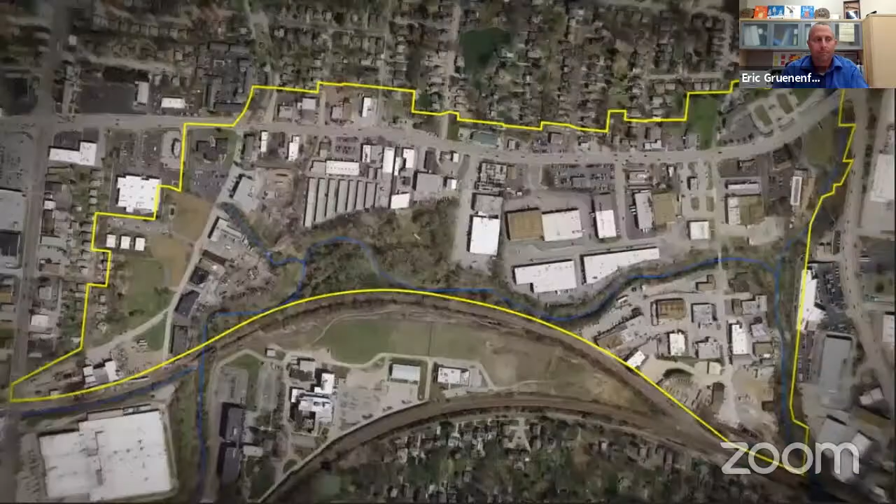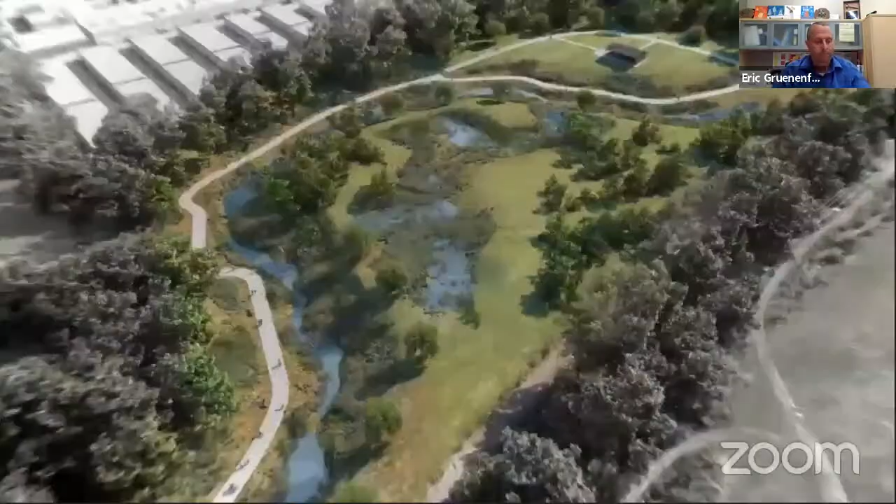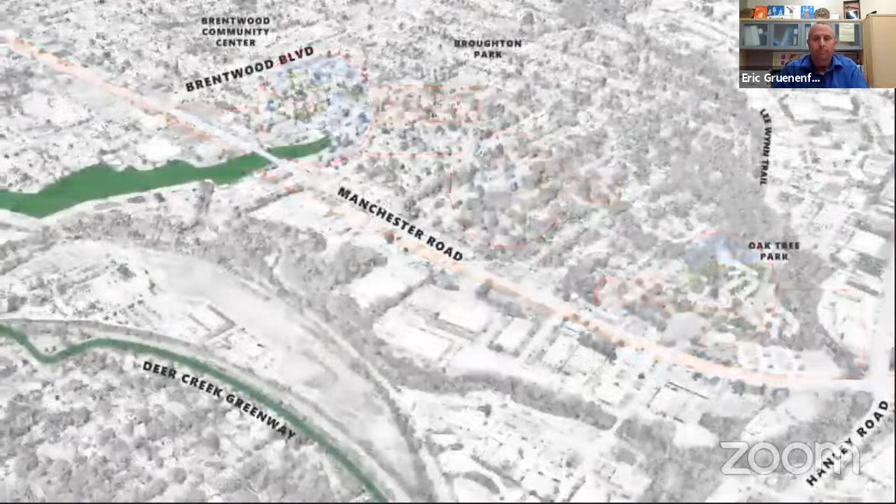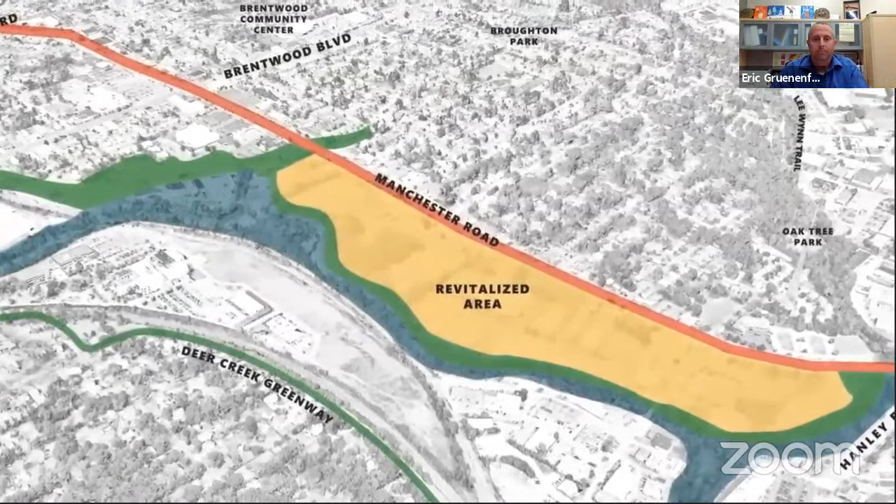As you may have heard, Brentwood has struggled with severe flooding for the past 100 years. As you can see from this map, it's no surprise that we have a flooding problem along Deer Creek. Due to public safety concerns, this area has been legally declared blighted. Brentwood Bound is a vibrant collection of projects that are all bound together. After completing the flood mitigation, our floodplains will be restored so they can adequately mitigate the flooding in the project area for the 100-year storm event. But so much more than a restoration project, Brentwood Bound also includes plans to revitalize our city. In partnership with MoDOT, we're going to enhance the Manchester Road corridor between Hanley and Brentwood Boulevard. Finally, Brentwood Bound plans to form a trail connection from Rogers Parkway just north of Manchester to the Deer Creek Greenway. We're excited about building a bright future for Brentwood, and we hope you are too. Together, we can complete the Brentwood Bound plan.

So that's just a quick introduction video that the city had done a few years ago to introduce the project to our residents, to the community, to the greater St. Louis region as a whole.

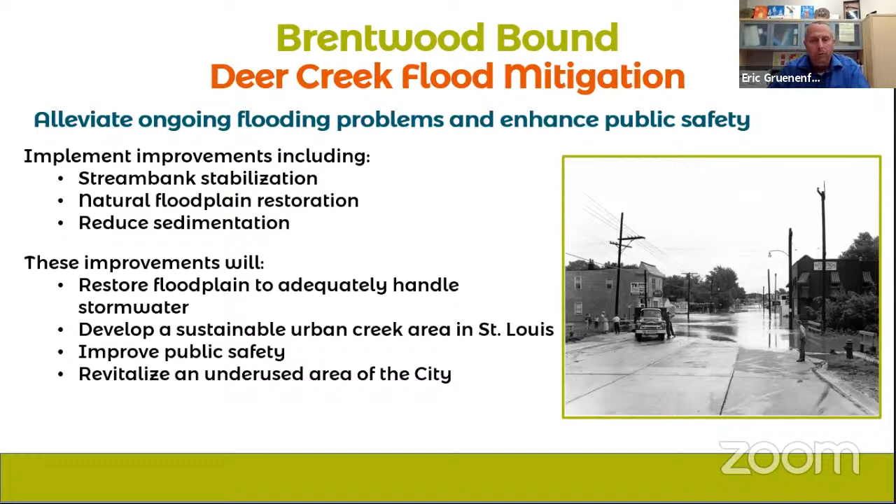The primary objective from the beginning was to alleviate the flooding on the Manchester Road corridor. The project included many improvements to Deer Creek, including stabilizing the stream bank, restoring the natural floodplain, and introducing design elements to reduce sedimentation. Once completed, the floodplain will handle the 100-year flood event. We'll actually create an urban creek in the St. Louis metropolitan area, something fairly unique, and revitalize an underused area of the city.

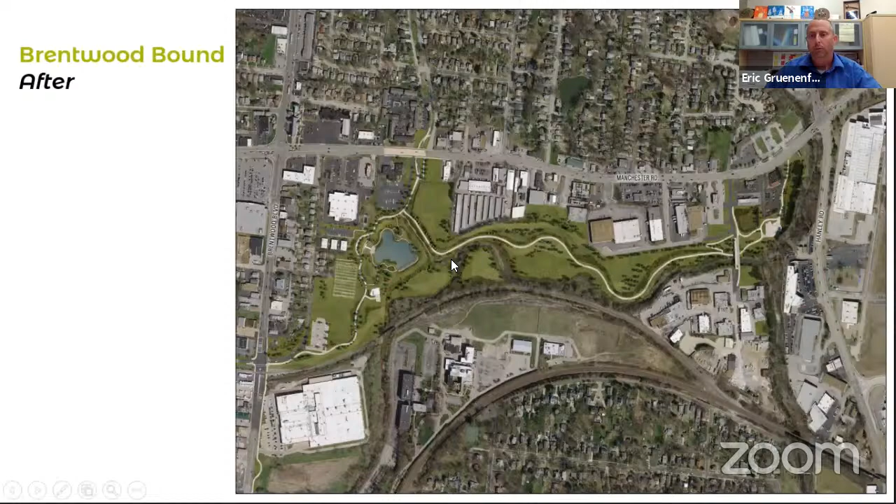So to start, we have some before and after shots. This is what it looked like before, and this is what the whole project area will look like once it's done.

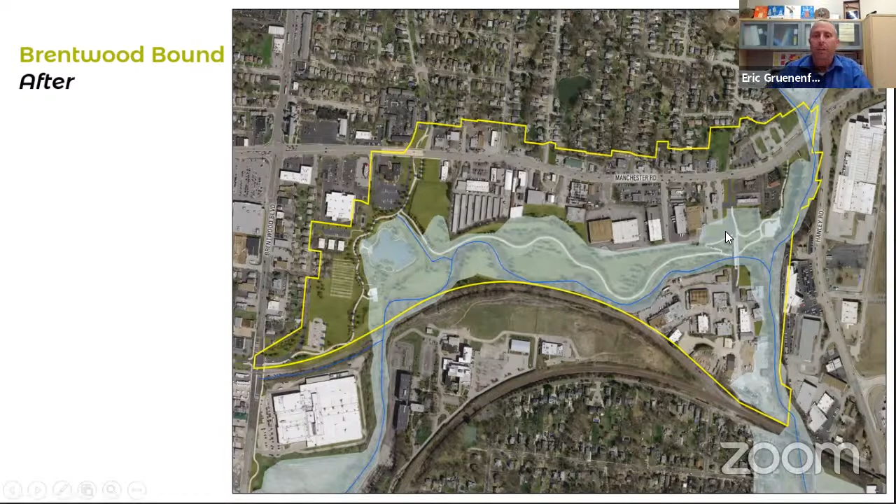The yellow outline shows the current flood limits, where any hard rain causes flooding all the way down Manchester Road and even into residential areas across the street. Once the project is complete, this lighter shaded area will become the new floodplain for the 100-year flood event, containing everything within a natural restorative floodplain.

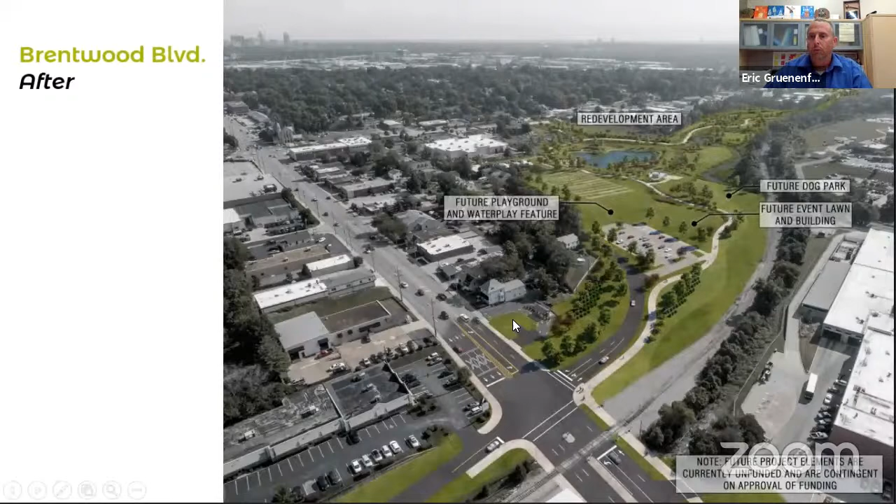This is Brentwood Boulevard, with Bi-State down here and Manchester Road at the top. This is how it looks right now, and again, what it will look like in the future.

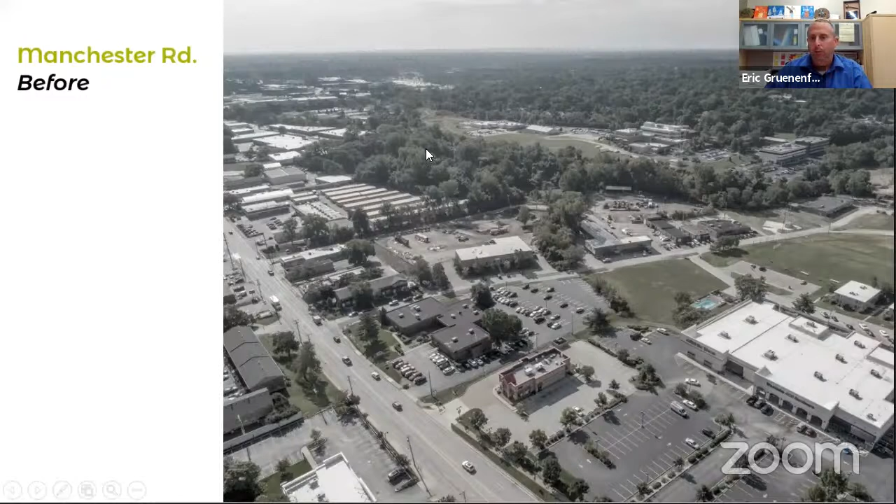Manchester Road here, Mary is kind of there, Brentwood's up here, and Hanley Road is over this way, just to orient everyone. And again, this is what it will look like, hopefully, when we're done with the project.

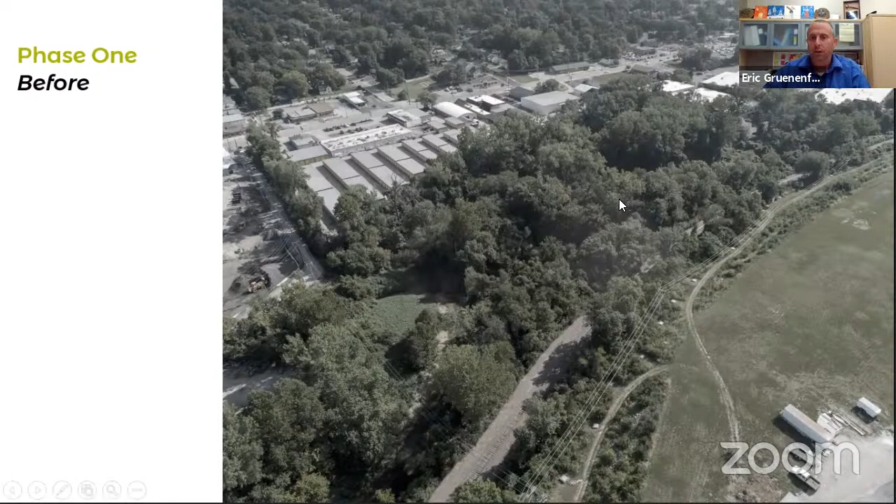Then what we call phase one, from Mary Avenue all the way to Breckenridge Industrial Court. You see Manchester Road up here, and once we restore the creek and flood bank, you'll see a lot more green space and a recreational trail for use by citizens.

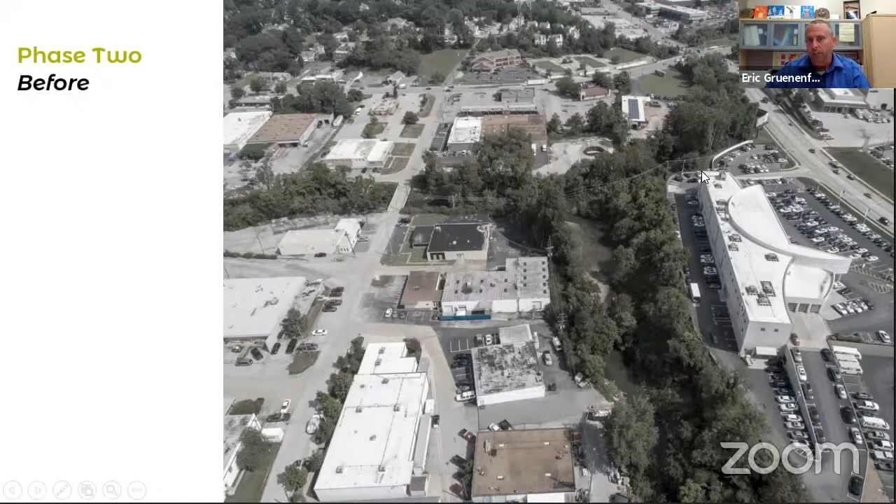Then phase two, from Breckenridge Industrial Court all the way to Hanley Road. This is Hanley Road over here. And again, finally, what it would look like. So that's just some before and after shots for you guys.

Once the project was approved and the city started design, the team quickly looked at green sustainable features to include. We focused on creating a series of floodplain benches along Deer Creek, significantly reducing impervious area. These floodplains allow water to spread over a larger width, reducing erosive velocities and shear stress in the channel during heavy storm events.

The main channel of Deer Creek is intended to adjust naturally to form a stable configuration. By removing construction debris and restoring more natural channel material, the restoration will be self-mitigating and improve water quality by restoring the ecosystem. The project will use permeable pavement and small wetlands to store and treat water, utilize renewable energy like solar panels, and native prairie plantings to assist native habitat. It will also reuse excess soil as fill in different parts of the project instead of taking it offsite to a landfill.

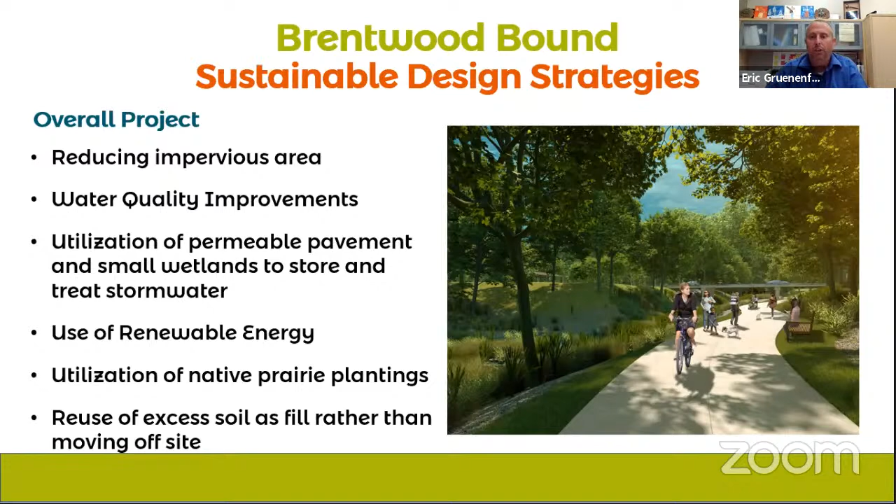So we'll look at specific improvements by project area. Manchester Road doesn't really lend itself to multiple sustainable features, but we focused on making the corridor more walkable and bikeable. The pedestrian tunnel underneath Manchester Road is critical to the project's success, connecting the Brentwood Park Trail System with the Deer Creek Greenway. There will be 10-foot shared use sidewalks on both sides of Manchester Road, and all light fixtures will be LED moving forward.

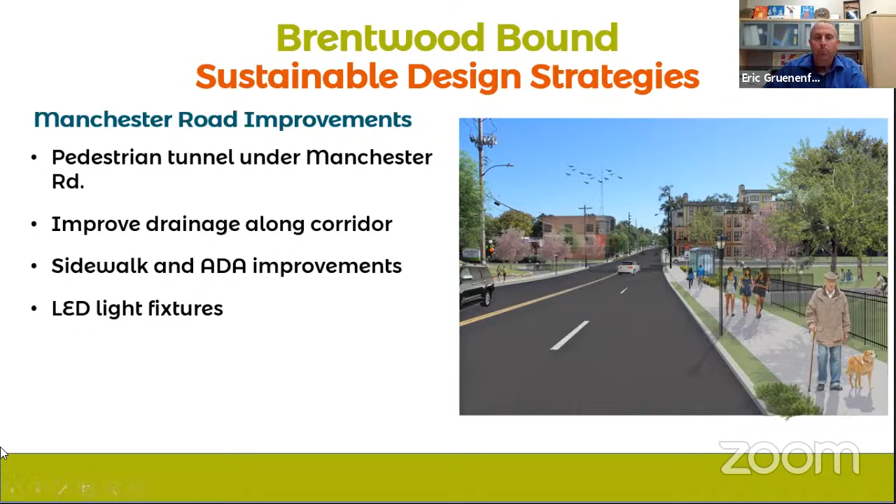We have a number of water quality improvements, which we really focused on, since this is a floodplain restoration project. The first is the Mary Avenue Pond, near Manchester and Brentwood. The wet pond will receive water that currently flows directly into Deer Creek, and by increasing retention time, we can increase water quality benefits, letting the water heal before it moves into the creek. Our engineers estimate this pond will reduce 32.2 pounds of nitrogen and 6.4 pounds of phosphorus entering Deer Creek annually, while treating 80% of total suspended solids.

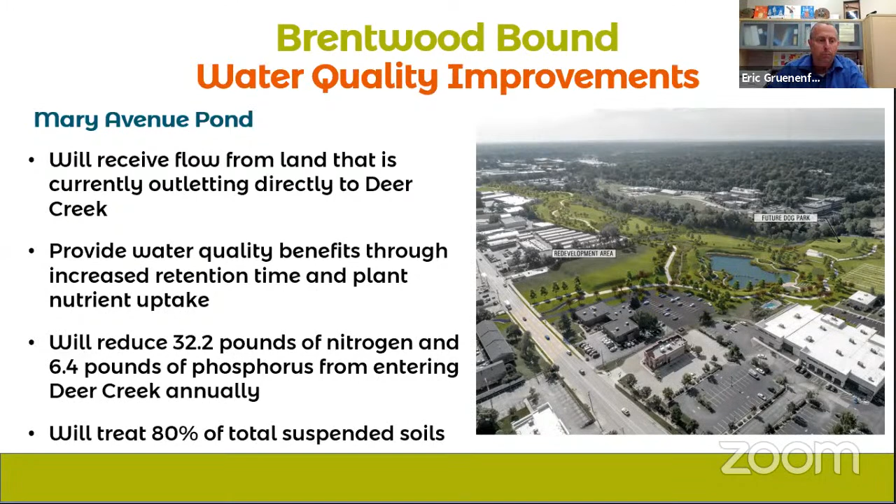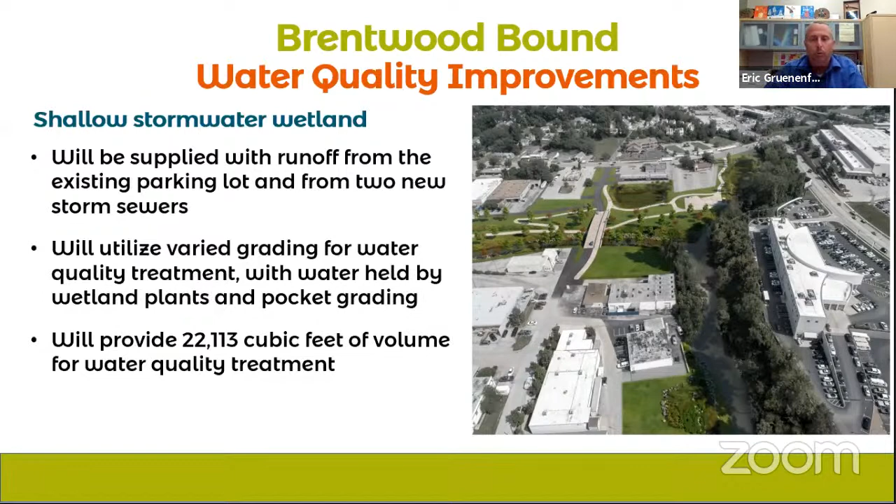The second part is this shallow stormwater wetland, right up here, with Manchester and Hanley's on this side. This wetland, at the confluence of the two creeks, will be supplied by runoff from an existing parking lot and two new storm sewers running along the project area. It will utilize varied grading below the culvert for water quality treatment, with water held by wetland plants and pocket grading, providing over 22,000 cubic feet of volume for water quality treatment—almost tripling what's required to mitigate the disturbed area. This pond, along with the Mary Avenue Pond, will be designed to have permanent pools of water for optimal plant and wildlife habitat.

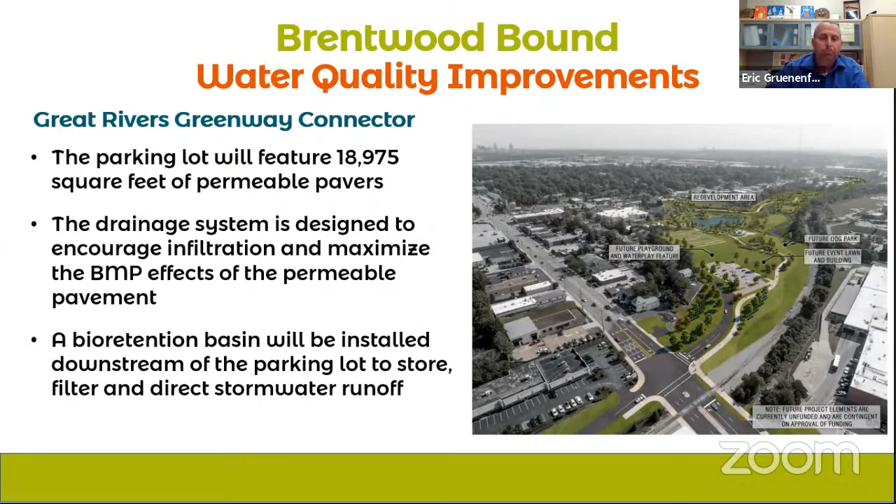Finally, this is the newest part of the project, and one we're really excited about: recently the city received a Missouri Department of Conservation grant to assist with the purchase of a little over 6 acres of land located just south of the bi-state agency. So this is bi-state, here's our main project area, and that's the connection to the GRG trail to Deer Creek Greenway. We'll have this wetland right here as part of our project.

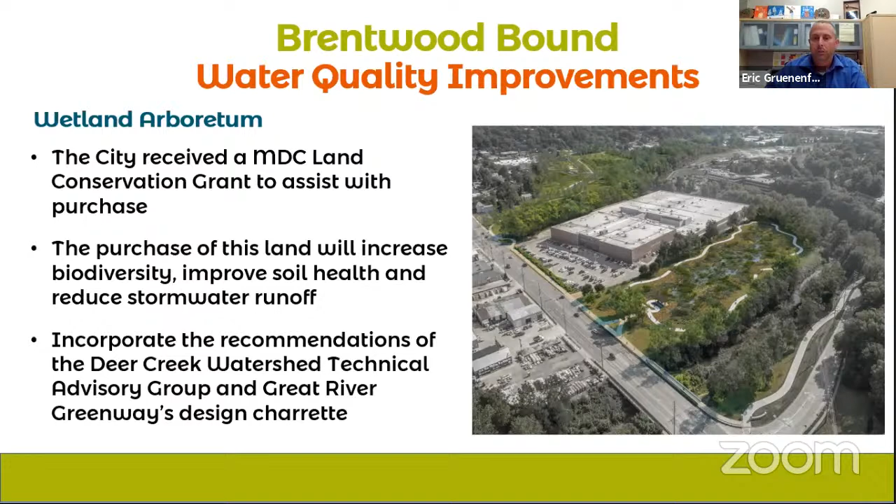In the grant, we indicated we would follow the recommendations of the Deer Creek Watershed Technical Advisory Group and the GRG's design charrette developed for this property in 2016. The city is really excited about the possibility of this purchase because of the benefits associated with the project. We're even more excited because we were part of that charrette back in 2016, and we've been looking forward to its implementation ever since.

The consensus of the charrette was to use a minimal disturbance approach and incorporate site enhancements into three separate zones. On the hillside, the recommendation is to slow and capture sheet flow from the parking lot and from Brentwood Boulevard by installing an at-grade buffer strip with native wildflowers and grasses. For the wetland arboretum, zone two, the recommendation was to create a wetland arboretum with clumps of native trees and shrubs interspersed with native grasses. Finally, for the riparian corridor, the recommendation was to increase the width on both sides of the creek and expand that corridor.

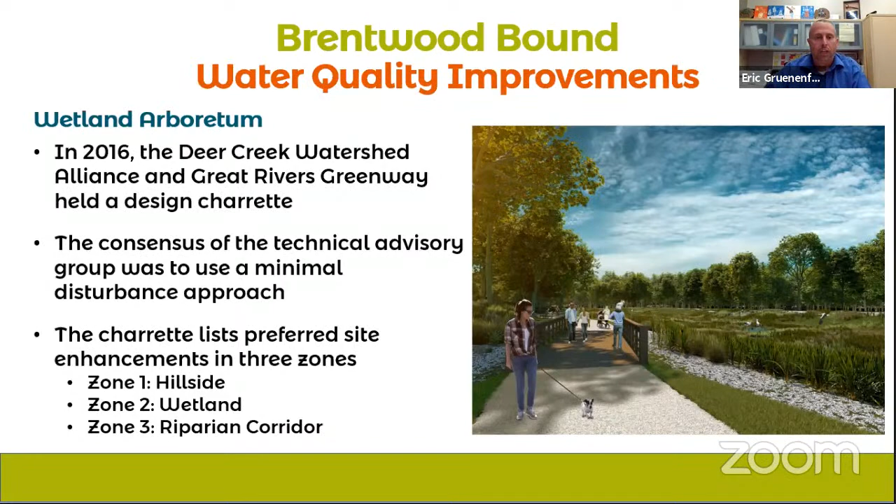What we see here is a beautiful educational piece that brings people down. It's right off the trail, and it will be a wonderful educational amenity that we can provide to the city.

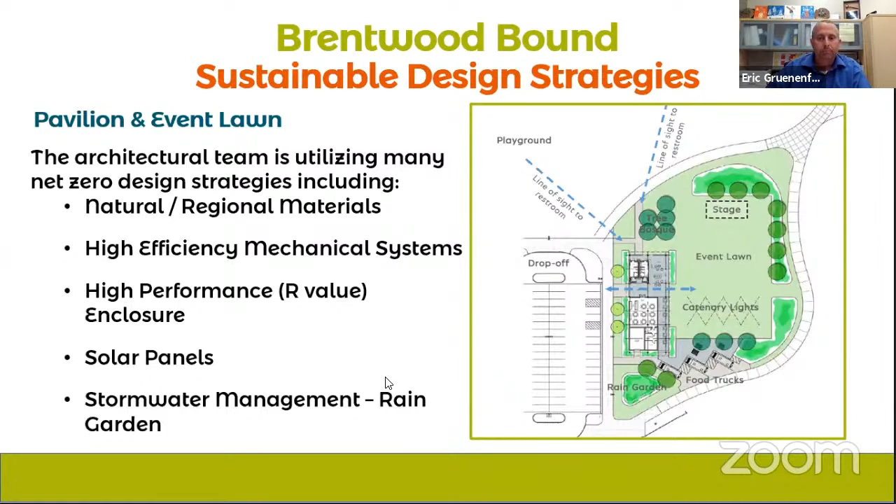The city is also looking at sustainable design strategies for ancillary projects within Brentwood Bound, the first being our pavilion event lawn. Our architectural team is utilizing many net zero design strategies—I don't want to steal Todd's thunder, he'll be talking about this more in his presentation—but our pavilion will include natural regional materials, a high efficiency mechanical system, high performance enclosure, solar panels, and a rain garden south of the building for stormwater collection. We have a couple quick renderings of what that will look like, especially with the solar panels on top, and we think this will be a great addition to the city, showcasing how we're utilizing solar in something like a pavilion.

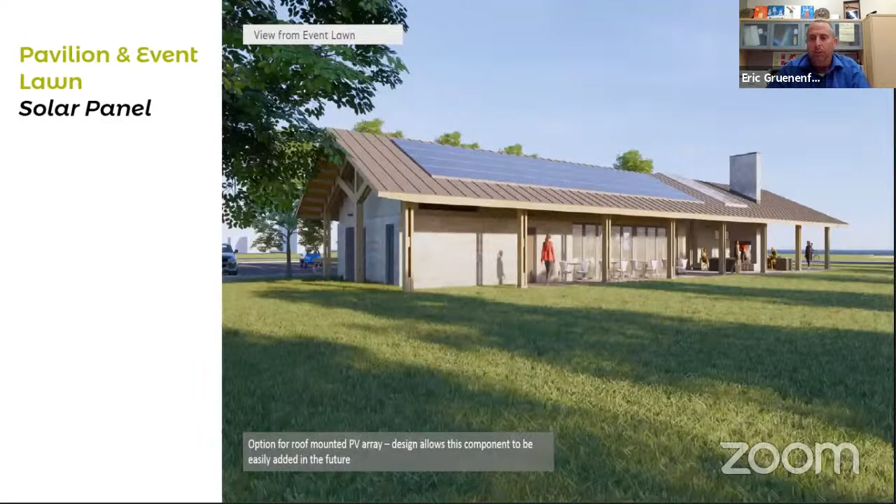Finally, we've just started design on what we're calling our destination playground. We're working with SWT, who has a long history of including sustainability into their projects, backed up by what they're doing with their own building. We're really early in the process, so we haven't gone through everything, but some of what we've discussed includes a water recovery and harvesting system. When we have this water play system, the water will flow down and we'll pipe it to a storage tank, then use that reclaimed water for irrigation throughout the entire project area.

We think that's a great sustainable use of the water that will be used in that system. Any place you see shade structures, we're looking about the possibility of putting solar on there. The use of native plant materials, a pollinator garden.

Another thing we're really excited about is this demonstration of rain gardens and BMPs. As it comes down here, we can use this area as a demonstration educational site of how to collect stormwater and the benefits of doing all that with the rain gardens and other avenues.

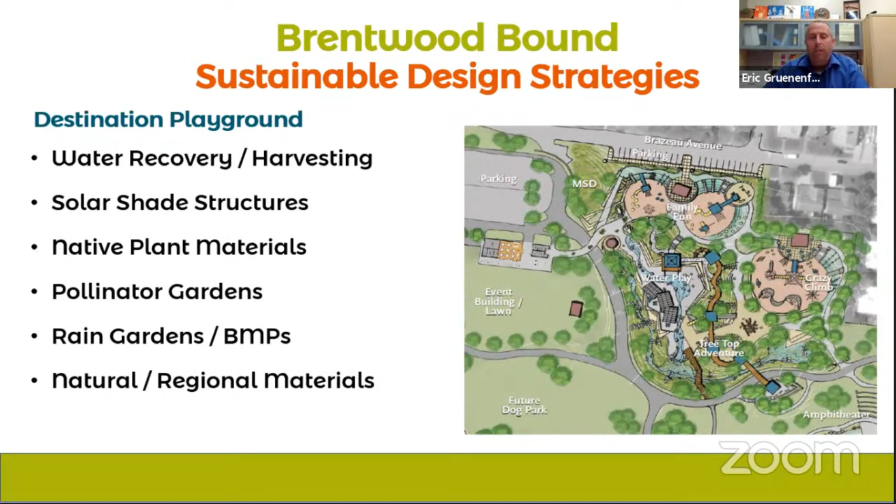And then finally, again, we're going to use natural and regional materials. That is a brief introduction to some of the highlights of something we've been working on for the past 5 years. I could go on, but I'll turn it back over to Lisa and be happy to answer any questions if there are any.

Great, Eric, thank you. That was wonderful. And I think we're going to save the Q&A for a little bit later in the presentation run of show. But I do want to introduce the next presenter, and that is an individual, Todd Sweeney, with Net Zero Kept Simple, also taking place in Brentwood.

And Todd, prior to joining Navigate Building Solutions, served as vice president for a commercial construction firm and was a licensed engineer. Over Todd's 30-year career, he supported the design, construction, and management of over 300 projects, ranging from large-scale institutional projects to small publicly funded infrastructure. Todd has worked on numerous LEED certified facilities in the region.

And what they are working on is Navigate plans to build a net zero energy corporate headquarters in Brentwood. The development is expected to be certified as the state's first net zero commercial building by the International Living Future Institute by the end of 2022. Very exciting. Todd, with that, please take the floor.

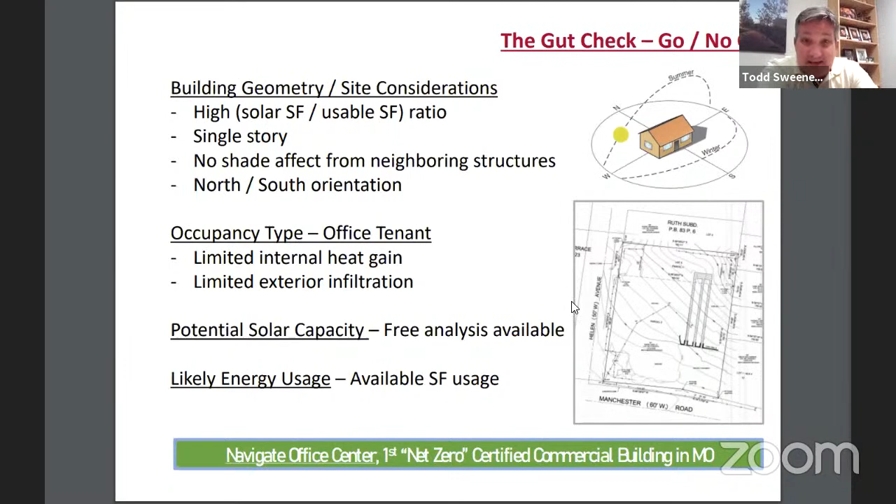Next slide, please. So the next thing I went to my partner and said, I'm going to keep this simple. We're all about simple: single focus, net zero energy, and I need a payback of 10 years or less. The solar guys were already telling me I had a payback of about 7 years. That sounds good, but I'm thinking there are going to be other costs that jump out at us, or that I don't even know about. So I've got a little wiggle room before I'd say no-go on this. But right now it's a go.

That was so important, because as soon as people heard we're doing net zero, I got calls from every architect and vendor in town saying, if you're doing net zero, that means you've got to be doing a platinum LEED building, right? So you're going to have water, solar, all these things you've got to add to your building. And me, I'm like a squirrel, I get excited about that, I want to chase the nut. I'm like, yeah, that sounds good, except it doesn't get us back to the single purpose, which is net zero in 10 years. All those things are expensive.

So not to take away from all the positive sustainability things we can do in our industry—U.S. Green Building Council, we're all here for that reason as well, has moved the needle in remarkable ways we're proud of—but for this exercise, we're just trying to do one thing: balance the equation. Next slide, please.

So we went through a process. We did the gut check, we set our goal, we registered our project with the International Living Future Institute, and we met with their coach. They have a nice program. I know the local chapter of U.S. Green Building Council is also working with them on some joint things, and I think that's very exciting—it's a wonderful collaboration. We advanced our building and site design.

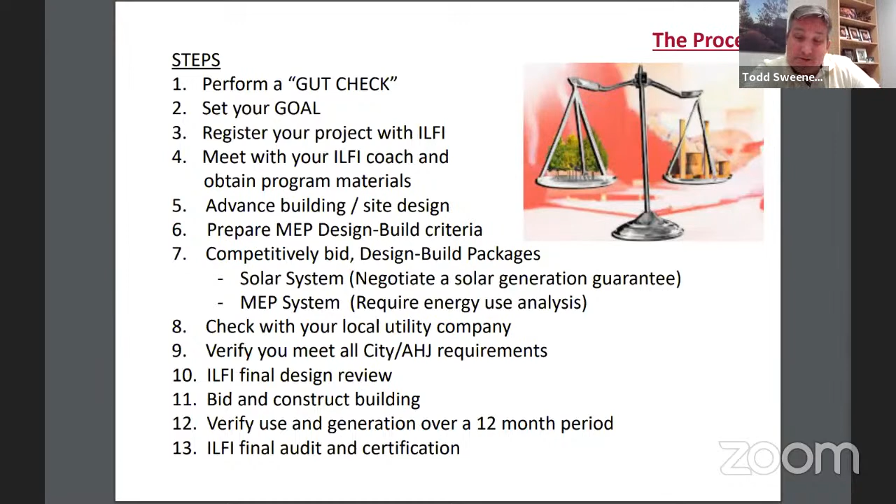So everybody says, well, what did you end up with? Well, we ended up with a project at 8419 Manchester Road.

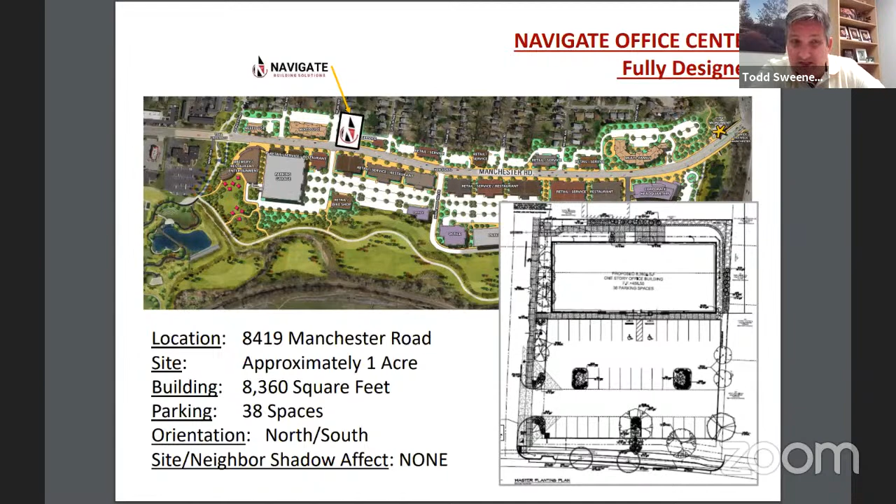You can see the diagram here relates back to what Eric showed you before. This is one of the visions of the redeveloped Brentwood Bound area. We had a different slide on there, I apologize, my logo wasn't supposed to be back on this slide. So we corrected that, Freddie. I'm not sure what happened, but anyway, hey, I got my logo again. But we're going to be located on this spot on Manchester Road.

It's an 8,300 square foot building, 38 spaces, north-south orientation. And really, as you can see by the diagram, we really don't have anybody around us that's going to cast shade onto our property.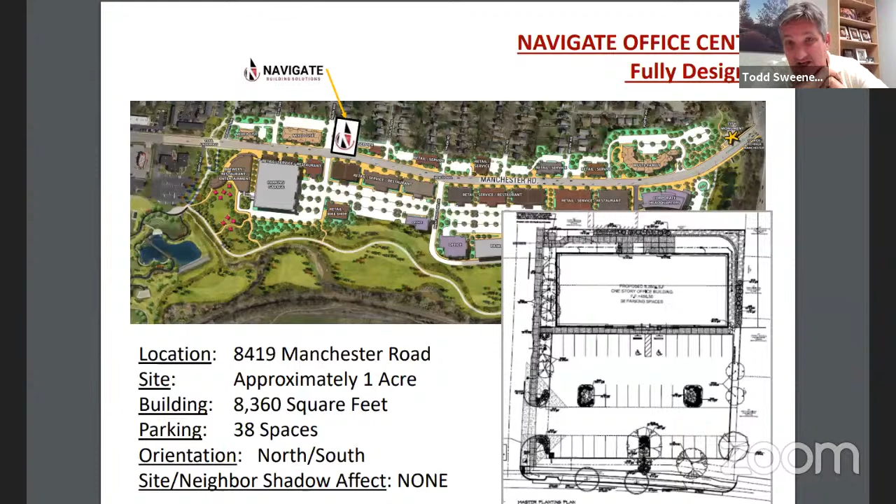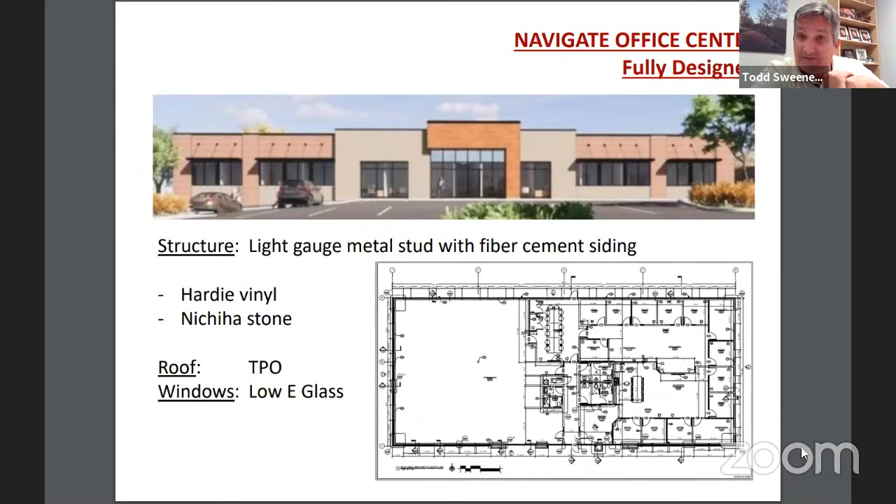Go to the next slide. We are light gauge metal stud fiber cement building with Hardie vinyl on the back and Nichiha stone on the front, TPO roof and low E glass. I can tell you nothing on there is a premium cost. There really isn't. Any architect in the room will tell you, oh yeah, it's about as inexpensive as you get for an office building. So what that says to you is you can do an inexpensive office building and still get net zero. If you go to the next slide, please.

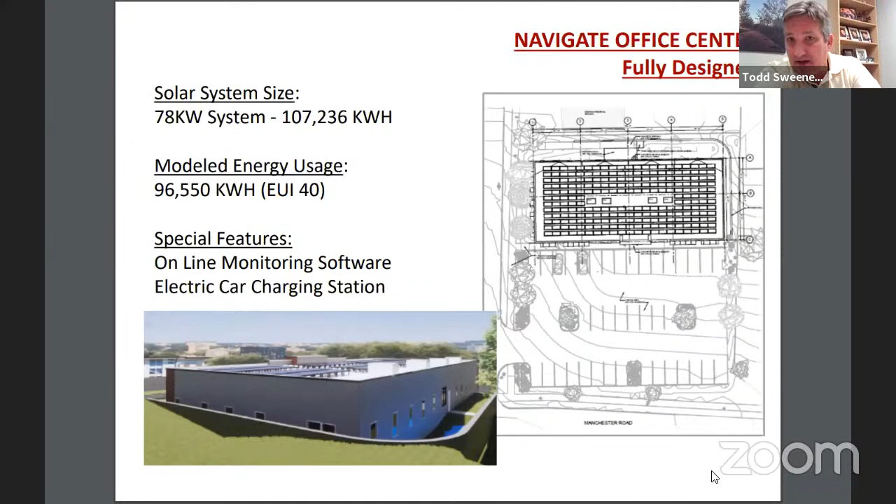We are going to generate 107,000 kilowatt hours and we're going to use 96. And I feel really confident that a 10,000 kilowatt hour buffer in there will be enough to ensure that we get net zero. Another couple things we're doing is online monitoring, which is kind of cool, which will be fun. And we'll have an electric car charging station.

Couple more slides. People always ask, so did you do it? Did you get a 10-year payback? I can say, yes, we did.

There were additional costs. First of all, we knew the solar system was going to cost us some money. What we didn't realize was the additional Ameren service cost, right? Because now, they want to pay to get power to your building, but they don't want to pay to take power back, which is fair. So we had a little bit higher Ameren costs we had to cover.

We had some more solar electrical feed costs that we wouldn't have had otherwise. We also had some additional soft costs, a little bit of modeling we wouldn't have done. We had the certification costs, which were right around $4,500 from International Living Future Institute. We had some additional accounting, additional of my time. We are consultants, so whatever I'm spending on this, I'm not spending on generating revenue from a client. And then we did lose a little bit of rentable square footage.

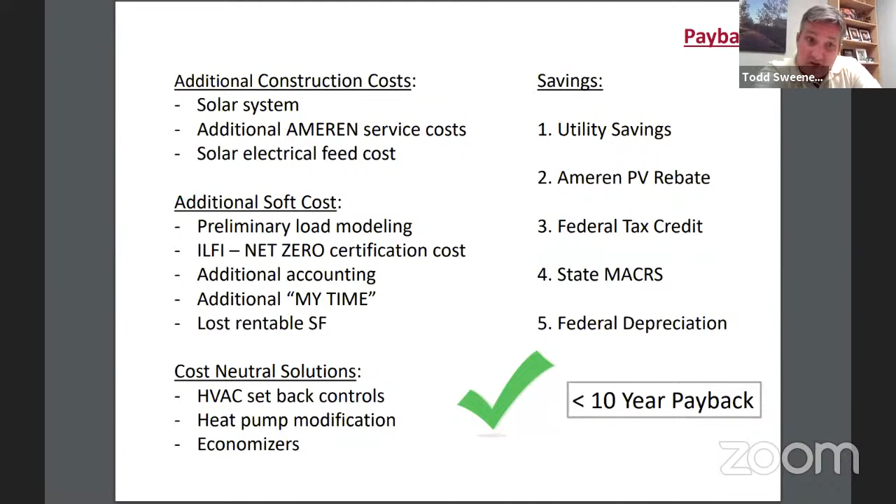People ask, why are you talking about these things? Because any developer you're representing or working with, this is the kind of stuff that doesn't show up when you just talk to engineers and architects. This is the stuff that impacts the bottom line of a developer, which I am in this situation with this hat. All those things together, we still came back with some savings as shown here and have less than a 10-year payback. Happy to offline share any of the numbers anybody's interested in hearing on that.

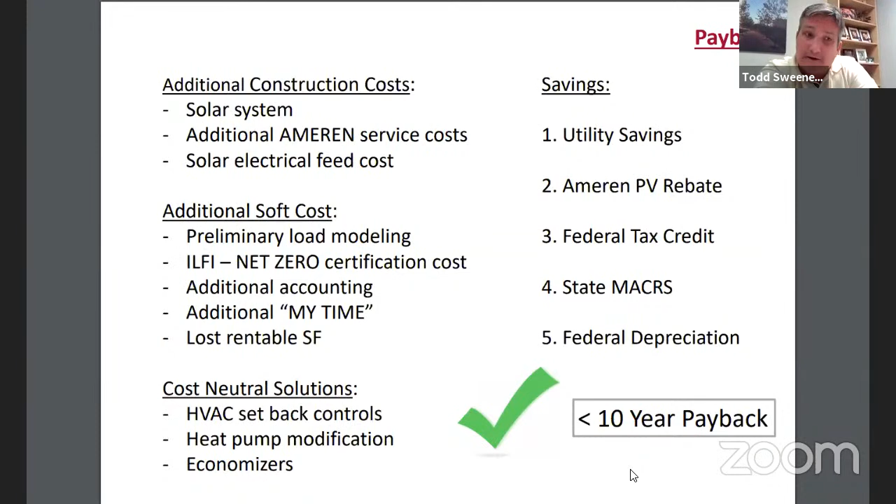Next slide. No, we're trying to, that's it. Oops, there it is. Thank you.

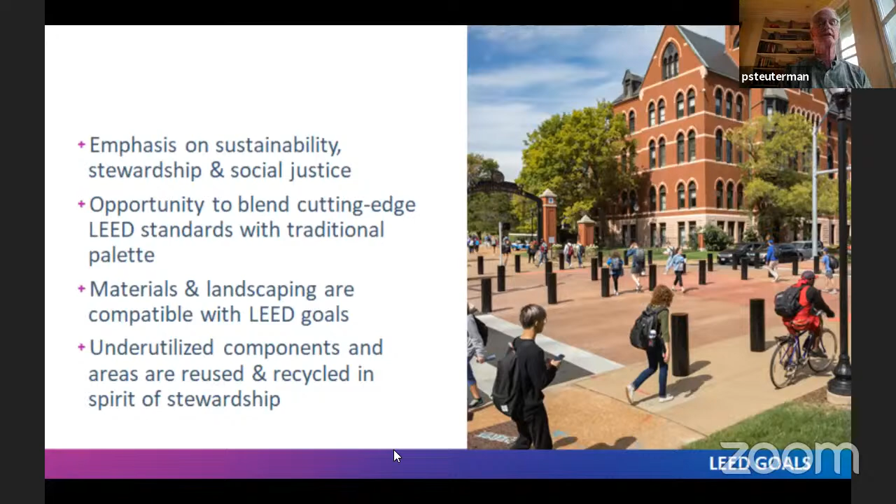Part of their mission, of course, is the emphasis on sustainability, stewardship, and social justice. This gave them an opportunity, when they brought this building online, to blend cutting-edge LEED standards with their traditional palette. If you walked the SLU campus, it is a traditional architectural palette, and yet they still wanted to meet LEED standards in a sustainable, cost-effective manner.

We did reuse some areas. We did reuse some components. There were some fountains and things like that that will be relocated to other parts of the campus. That was part of their goals.

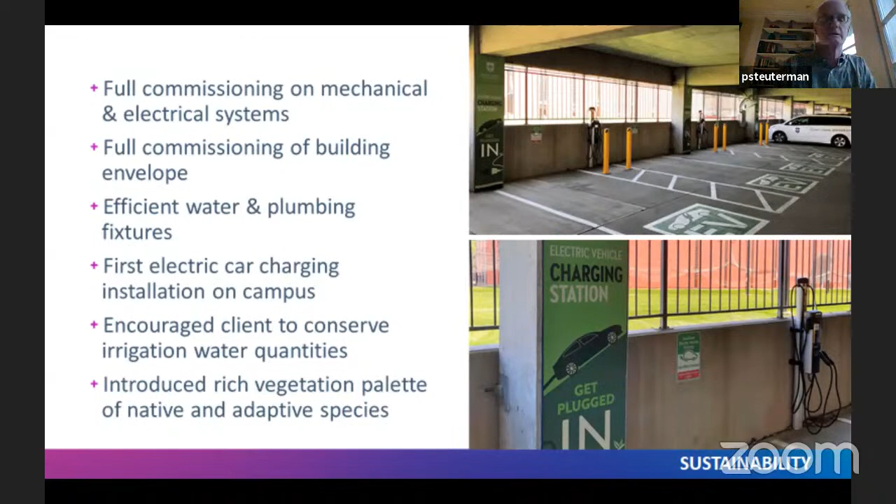Great. Thank you, Peter. That was wonderful.

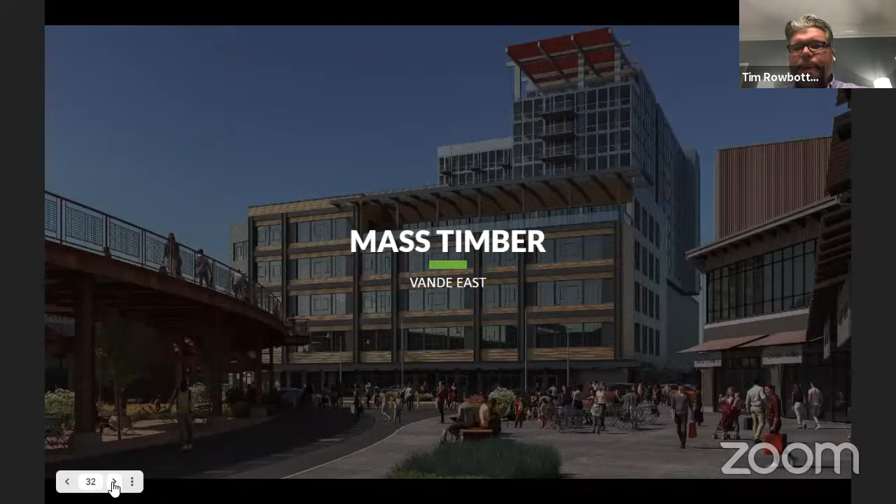So here you can see the overall site plan. The gray on the right-hand side is City Foundry Phase 1, the original Foundry building, the parking structure along Forest Park Parkway, and what's known as the BICO building up at Spring Avenue and Forest Park Parkway.

That building will have a Fresh Thyme grocer on the main level, and a company by the name of Deli Star, which is actually partnered with St. Louis University and their dietetics program. They're an innovative food company. And then in the blue, to the left along Van Deventer, you see Phase 2.

Phase 2 is comprised of an $80 million garage and residential tower that starts 7 stories up in the air and goes up to 14 stories, which is residential. Then the office building fronts on what we call the eyeball, that sort of oculus-shaped piece that converges Foundry Way at the point of the renovated Foundry and the new construction, which we refer to as Vande East.

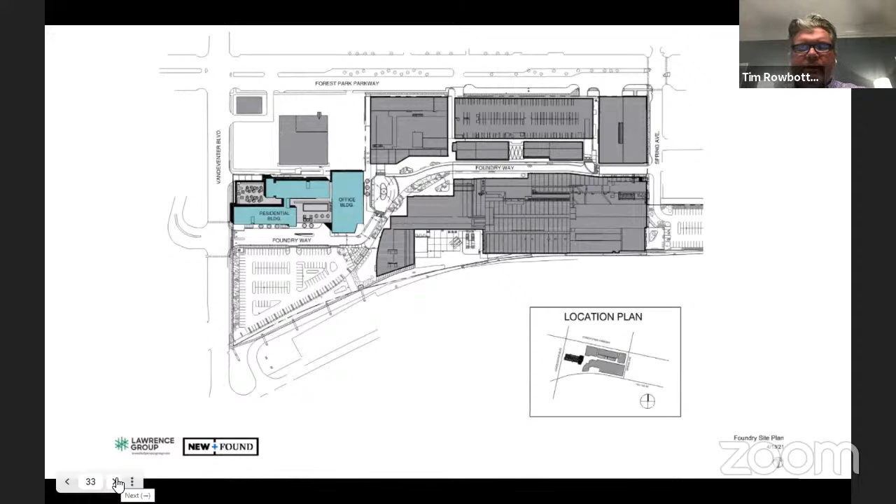Here's a little bit of a site plan zoom in, showing in orange the ground level of the residential building, and in blue the footprint of the office building. One of the challenges of the site is we're trying to maximize the floor plate, which is about 17,000 square feet per floor, on what is arguably a very tight site. We're hemmed in against the alley on the north, Foundry Way on the south, and the original Foundry building as you move to the east.

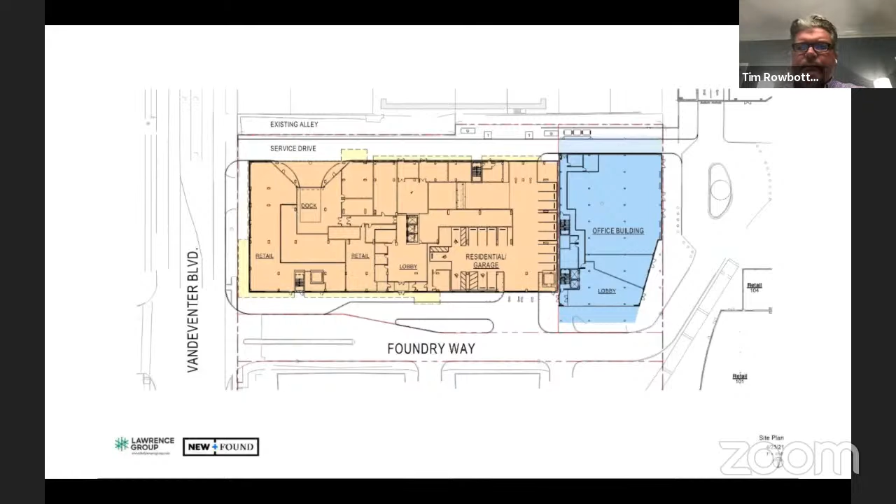And on the left is the tie-in known as the Brick Line, which is part of the GRG trail system that will ultimately go all the way to Forest Park. But this particular phase will connect the Foundry up into the Cortex Innovation District.

And the aesthetics of those spaces leads to a feeling and an air of sophistication about what they put in there from a programmatic platform. And we felt like the mass timber represented innovation in a way that would attract high-tech companies.

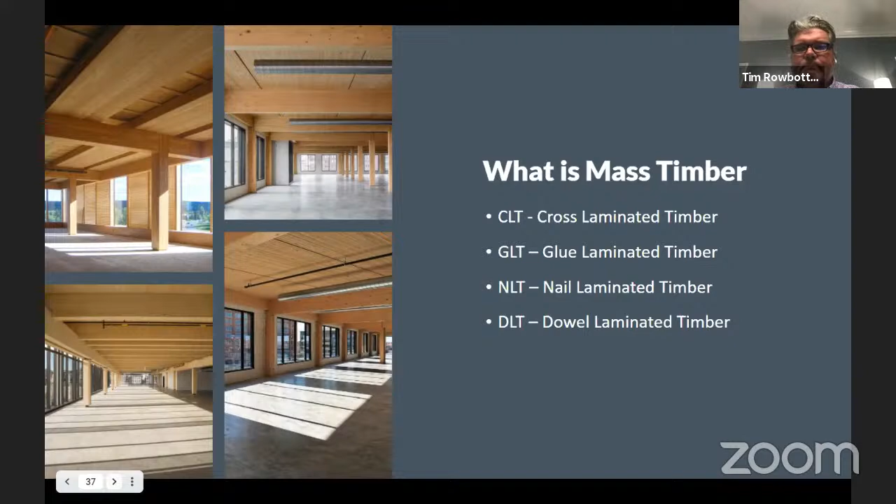So the big debate around mass timber is, does it really save carbon footprint over the predominant materials of concrete and steel? There's a lot of articles pro and con about it, but I thought we'd share a bit about our learning experience. We all know trees absorb carbon over their lifetime, within their branch networks, their trunk networks, and even within the forest floor itself.

There's a lot of great new research out about mycorrhizae fungi. There's a great book by the ecologist Suzanne Simard called Finding the Mother Tree. It's a fascinating read about how trees exist within the forest.

And so at the end of a tree's life, there are three possibilities. It can be a slow decay and death, which happens in a natural undisturbed forest. It can succumb to fire, disease, or insects, which is an accelerated carbon decay, or the trees can be harvested and they can store their carbon. We believe that's the premise behind the rise in mass timber design and construction that we currently see, not just in the United States, but across the world.

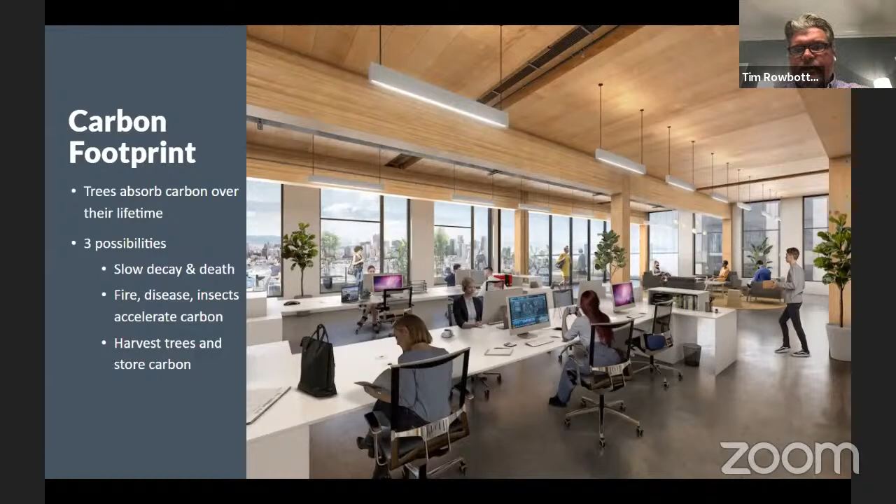So with respect to economics, everyone's probably acutely aware of the challenges occurring in the commodity markets right now. Material cost is not necessarily cheaper for a mass timber building. But what we've found is that the labor savings with an accelerated construction and erection schedule leads to construction efficiency. When our projects group did early cost opinions for City Foundry Phase 2, we determined the savings would equal and pretty much make a wash of trying to do the building out of steel or concrete. And again, as I said earlier, the aesthetic is really paramount to the marketability of the project and being able to attract top level tenants.